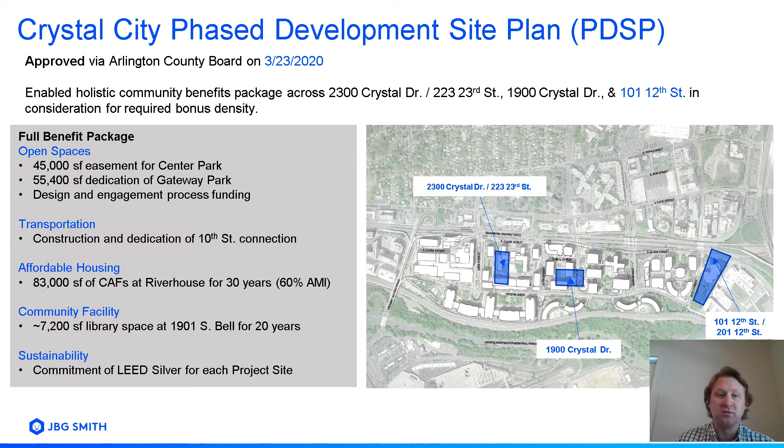Specific to 101 12th Street, commitments were made around dedicating open space, the contribution of dollars associated with the design of that open space, the construction of new South Ball Street, and the minimum sustainability commitment to achieve LEED Silver.

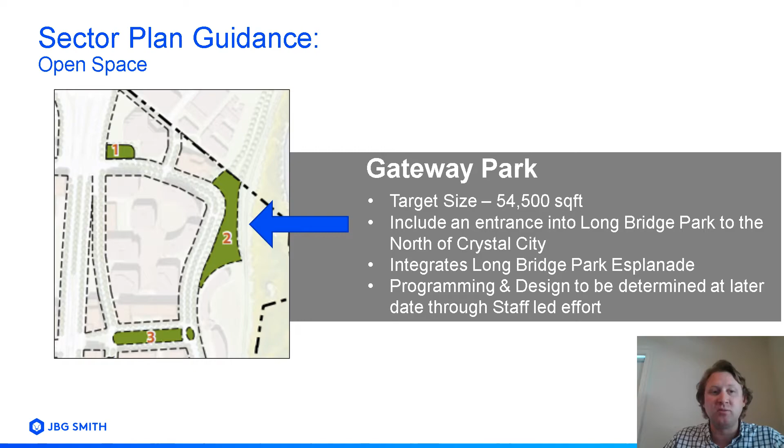This slide shows the open space that will be provided and how it is situated relative to the existing Long Bridge connection. You can see that there is a larger space located on the south side of the Long Bridge Park, which is currently improved as a passive green space. There is also a smaller space with approximately 15,000 square feet, which sits in between the eastern edge of the proposed 101 12th Street building and the existing Long Bridge connection.

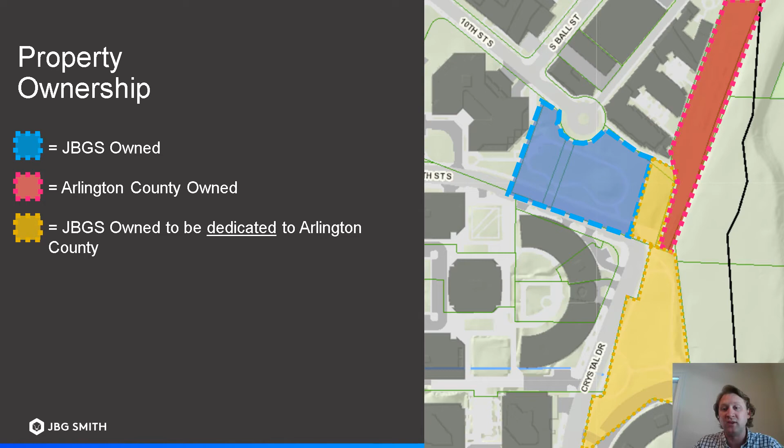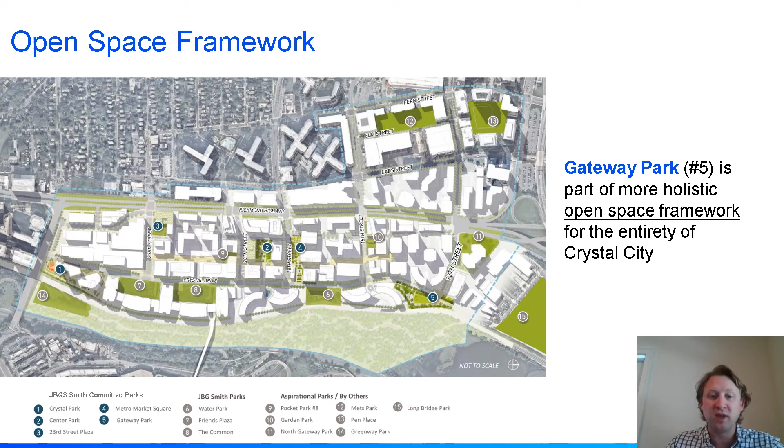Note the Gateway Park, or Park number 5, as shown in the associated graphic, is one of a number of parks that will be provided through the various development projects that JBG Smith has currently proposed. We have tried to engage with the community and staff in a holistic discussion to review the current sector plan recommendations about the specific programming for these various park spaces and think holistically about parks not just in Crystal City, but also resources within the wider available area.

In addition to the public open spaces, we have also identified a potential landscape connection along the northern edge of the project that we have been discussing with both county staff and the adjacent property owners. We have taken their recommendations and have made some changes that we think significantly improve the experience for pedestrians using this landscape connection.

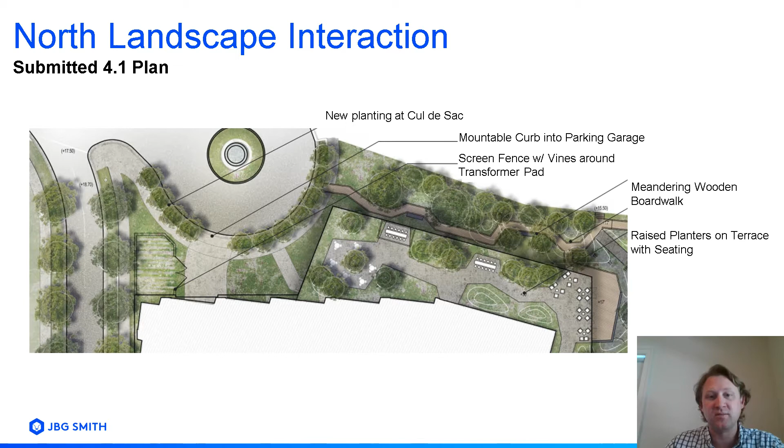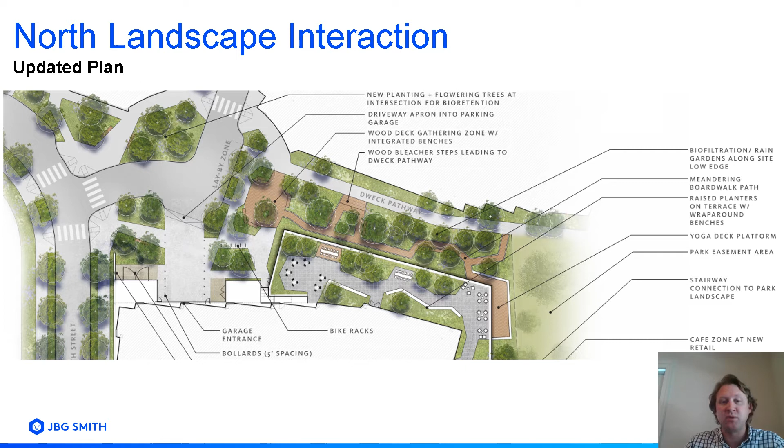Based on the feedback from both county staff and the Crystal City Lofts, we've been able to come up with this revised plan, which changes the configuration of the existing cul-de-sac in order to make additional space for both green bioretention areas and for passive gathering and seating areas. You can see that the configuration of the proposed decking and how it connects with the existing concrete pathway that leads north to Long Bridge Park have been revised to create additional areas for activation.

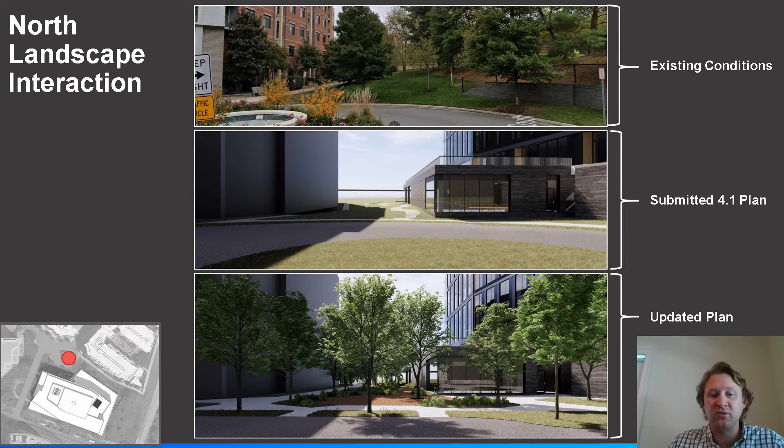And this now is showing an evolution of that design taken from the view at the existing cul-de-sac. The existing condition is shown in the top, the submitted 4.1 plan is shown in the middle graphic, and now the updated plan with additional plantings and expanded green spaces, as well as the large gathering area, is shown at the bottom.

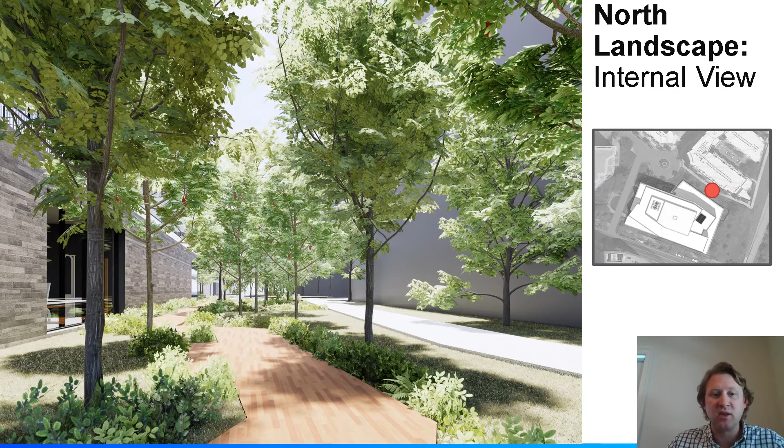And this rendering is showing the pedestrian experience for one using this new pathway, with the wood decking meandering through the rain garden, highlighting the bioretention capabilities of the associated plantings.

And in these images, we are highlighting the amount of green incorporated into the streetscape around the proposed project. The streetscape along 12th Street has remained the same from previous presentations, but as I mentioned previously, based on feedback from staff, the existing cul-de-sac has been revised to lessen the amount of impervious area and increase the potential area for more green plantings.

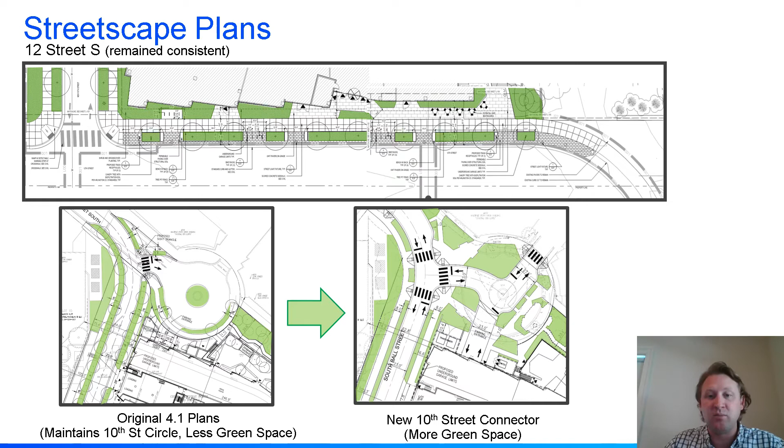And in addition to the streetscape, early on, the designers for the project identified the potential opportunity for how the existing Long Bridge Park could be connected and integrated into the proposed project. And this rendering is showing how the retail space proposed at the southeast corner of the project could help activate and connect into the future park space to provide a significant amenity to anybody using Long Bridge Park.

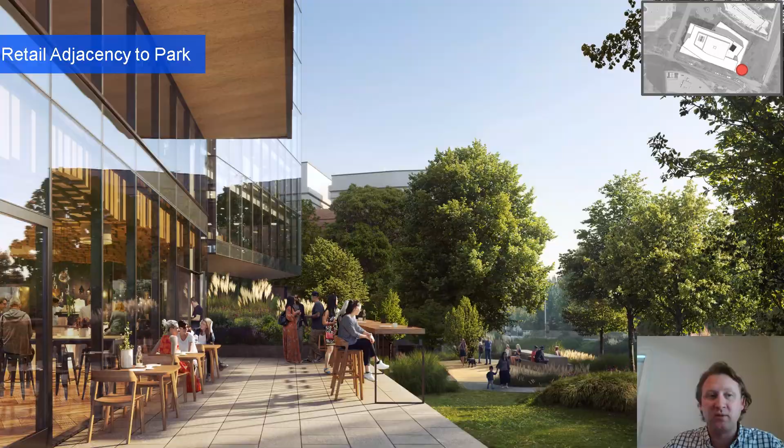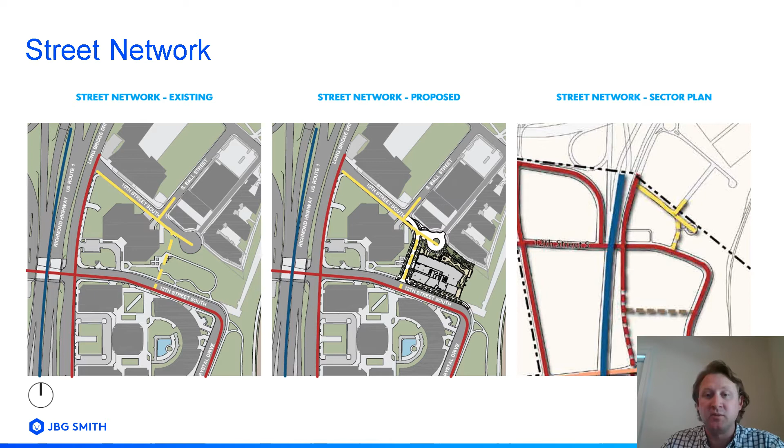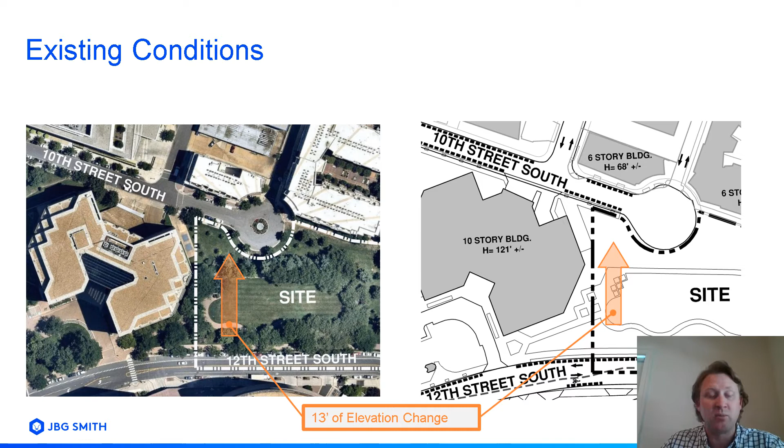With regard to New South Ball Street, which was indicated in the sector plan as a key objective that this project should achieve, the existing street network is shown on the left, and the proposed configuration of South Ball Street from the sector plan shown in the image in the middle and on the right. As highlighted in the SPRC number 1 presentation, a characteristic of the site that has been a challenge for the design is the amount of grade change moving from 12th to 10th. As shown in this graphic, there's approximately 13 feet of elevation change the South Ball will need to make up.

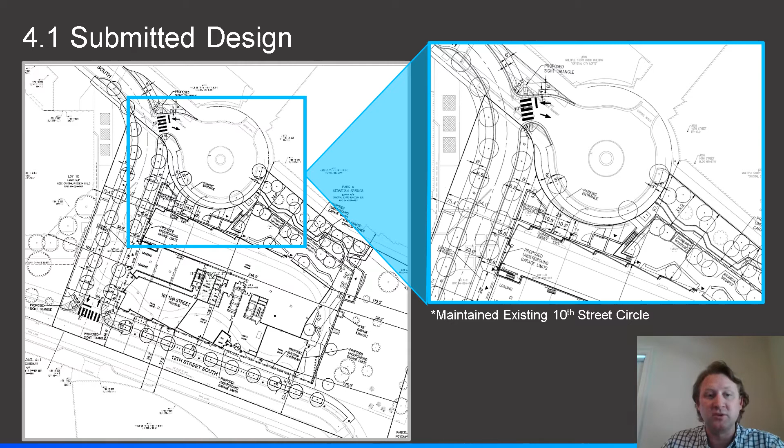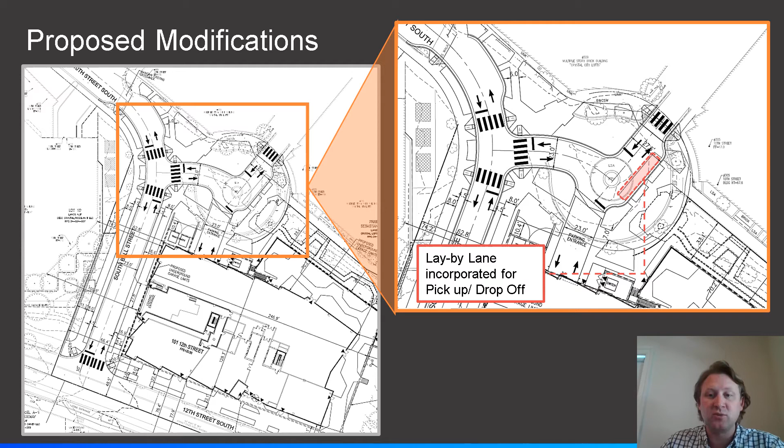This slide is showing the submitted design and configuration of South Ball Street and how it connected into the existing cul-de-sac. And this slide is now showing the proposed design, where you can see significant changes have been made to that cul-de-sac in order to simplify the traffic circulation, as well as create much broader opportunities for planting and bioretention.

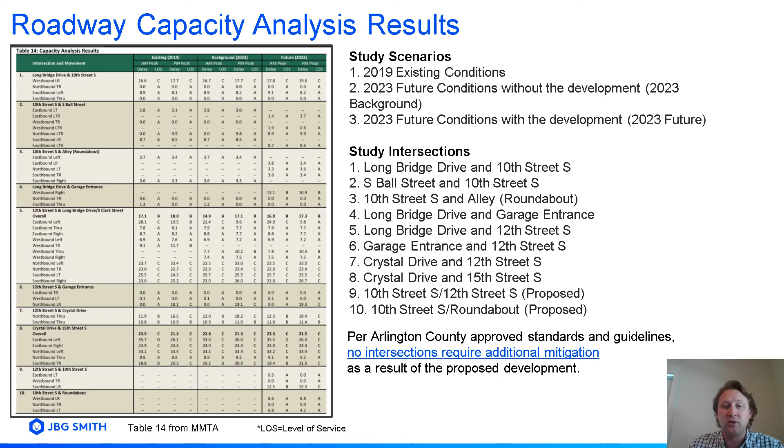In order to analyze the impact of New South Ball Street, our traffic engineer conducted significant study not only on existing intersections, but also on proposed intersections to try and determine the potential impact on the surrounding traffic network. For more information on the results of this study, I encourage you to access the multimodal transportation assessment that has been uploaded to the project page that can be accessed through the Arlington County website.

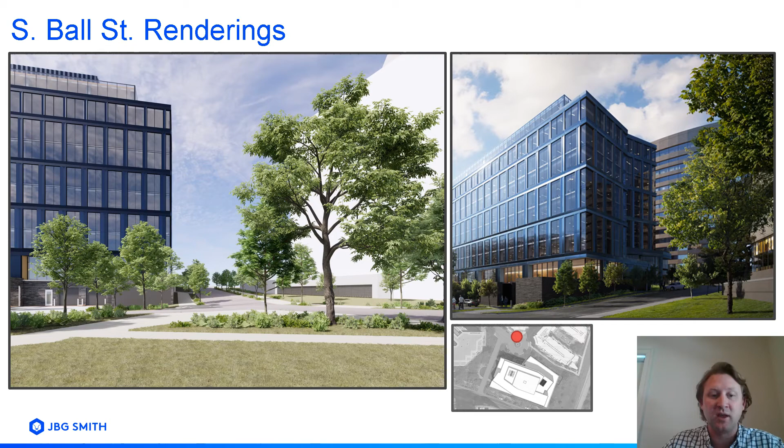As I mentioned previously, in the PDSP, we committed to achieving a minimum of LEED Silver. I'm here today to say that the project will achieve LEED Gold and that we are still in the process of finalizing the energy reduction commitments that we will be able to make. Additionally, we will have an expanded green roof and enhanced bioretention and stormwater management.

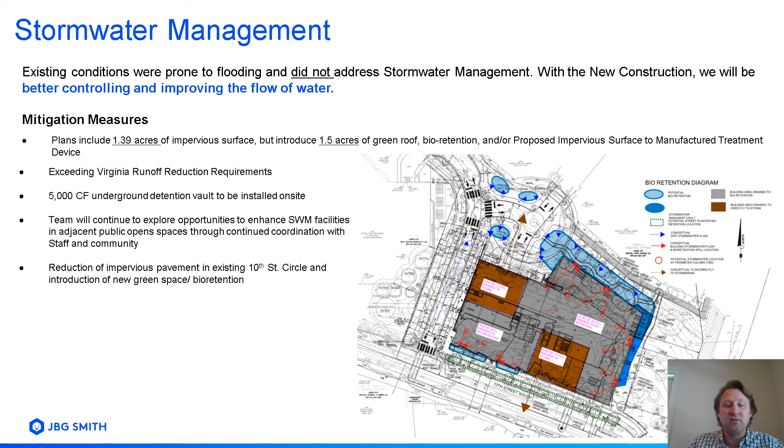Based on discussions with adjacent property owners, as well as with our own property management teams, we know that the frequency of significant rain events that cause flooding in this area are only increasing. Therefore, we have taken an enhanced approach to stormwater management. While the plans include 1.39 acres of impervious area, we're introducing 1.5 acres of green roof, bioretention or other treatment methods in order to deal with stormwater. This project is exceeding the Virginia runoff requirements and includes a 5,000 cubic foot underground detention vault that will help to decrease the impact of those significant rain events.

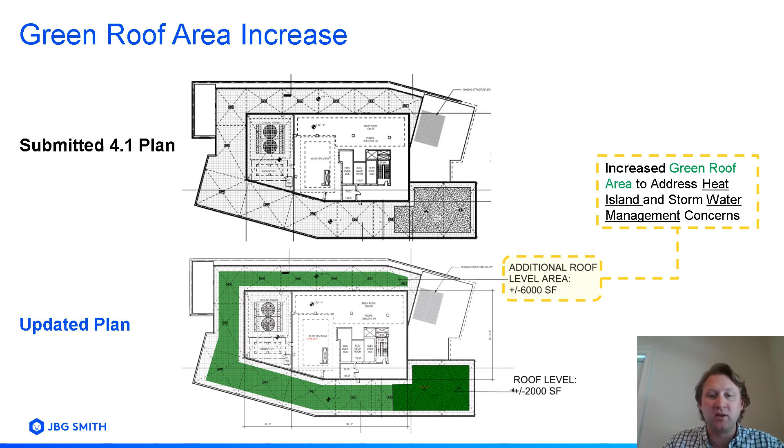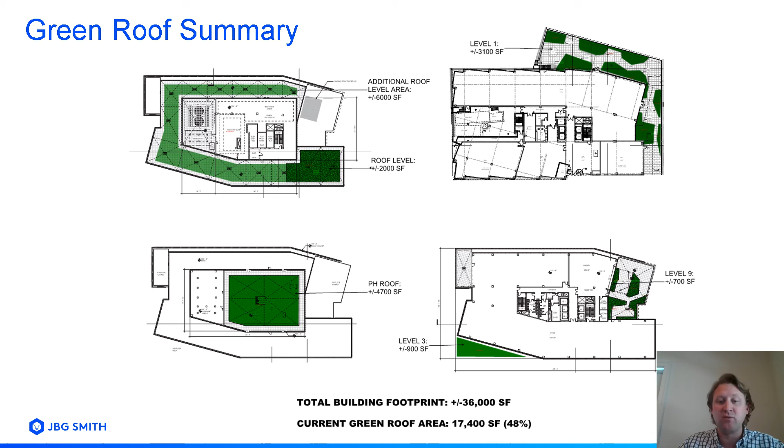Additionally, we have increased the amount of green roof area from the original application. You can see the submitted plan in the top image, and now the updated plan that adds almost 6,000 square feet of additional green roof. And not only did we add green roof on the main roof level, but we also looked at opportunities for the penthouse, as well as on the 3 outdoor terraces on level 9, level 3, and level 1. You can see that the green roof area from a percentage perspective is now 48% of the total building footprint. And these images are showing visually how the green roof area has been expanded from the original 4.1 application.

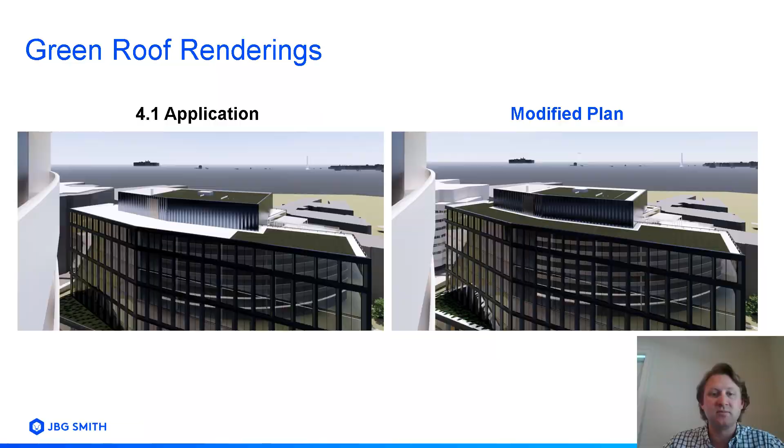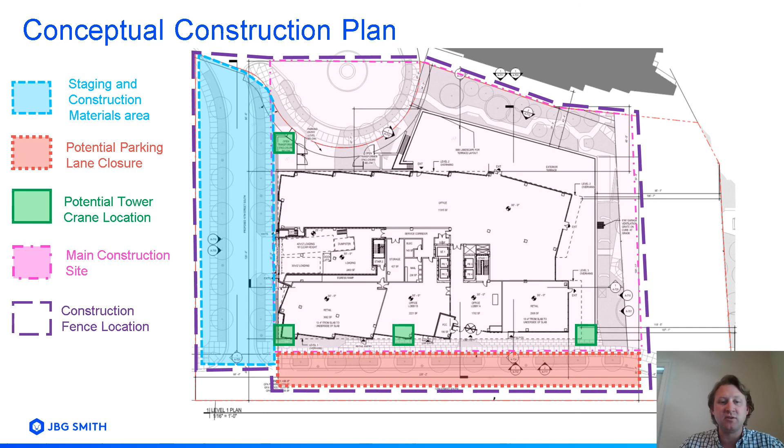In terms of construction implementation, you can see the boundary of the construction site fence, as well as the main construction area. Note that we currently anticipate using the sidewalk along 12th Street, as well as the location for New South Ball Street for staging as part of the construction of this project. And from a schedule perspective, the earliest we anticipate starting construction would be first quarter 2021, with the project having approximately a 2-year construction duration. Note that JBG Smith will not start construction on this project without a significant anchor pre-lease, so these dates are all predicated on us securing a tenant.

I want to thank everyone for their time and learning more about the proposed 101 12th Street project, and I'm very much looking forward to hearing your comments and feedback on the topics covered in this presentation.